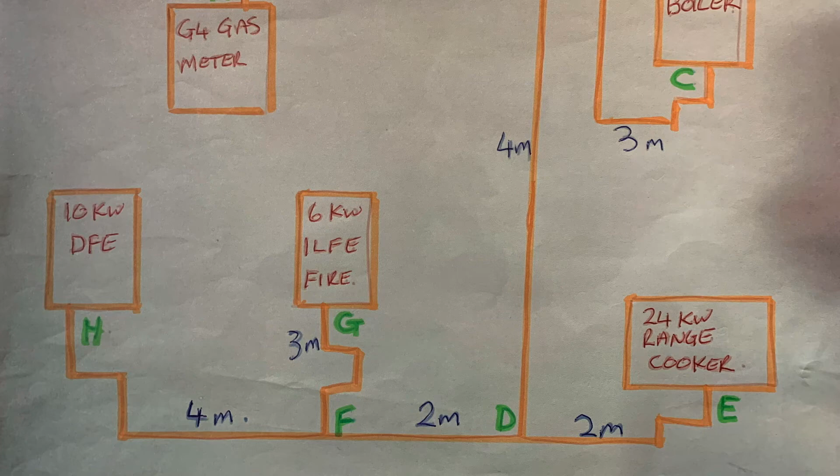In this video we're going to be going through step by step on how to complete the pipe sizing for gas according to British Standards BS 6891 2015. That's the standard we're going to be using to do that.

Everything is taken out of here, so there are a few things we need. First of all, we need a drawing of our pipe layout, including lengths of pipes and how many elbows and fittings we've got. So I've got that to help me.

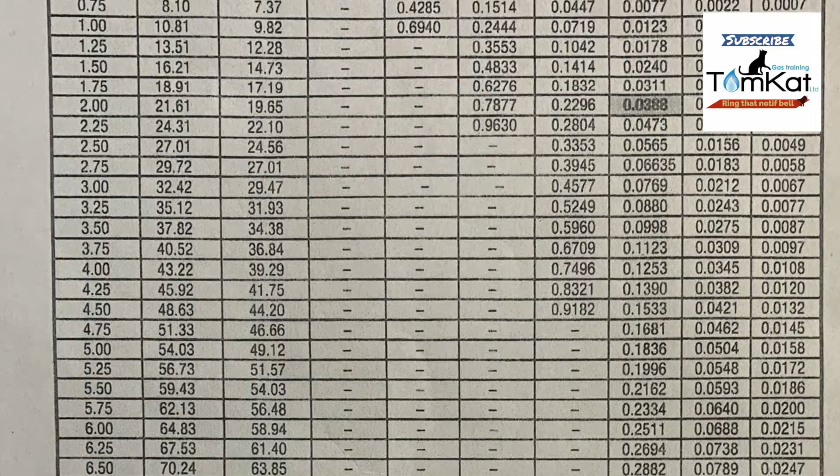We also, from the British Standards 6891 2015, need a couple of charts. From this chart here, we can see how many meters cubed an hour requires how much gas per meter, depending on the size of the gas pipe. We'll look at that a bit closer. At the bottom there's also a chart which tells us how many meters we would add on for fittings. Again, we'll look at that in a bit.

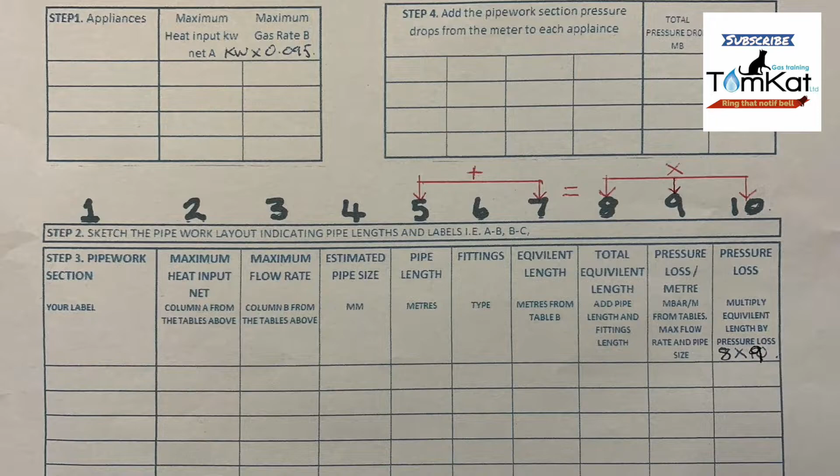And finally, we need a sheet like this, which is going to tell us what to do in this situation.

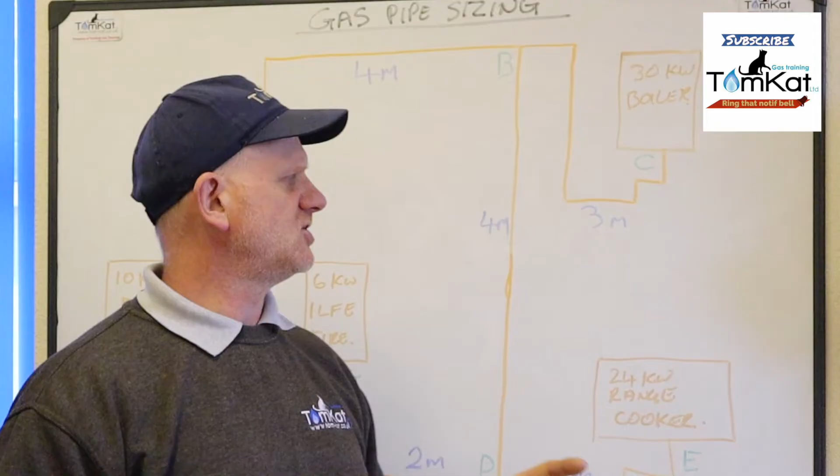Now, when you're designing this pipe layout and your installation, you must take into account the maximum gas flow rate meters cubed an hour going to the appliances. You should also really leave spare capacity on the installation just in case it needs to be changed. So if you wanted to up that boiler to 35, 36 kilowatts, you should allow spare capacity. But I guess if you did that, you'd never get the job, would you?

So these are the considerations you must take into account when you're designing this installation. Now, as usual on TomKat videos, I've waffled enough. Let's just get on with it now and find out exactly how to pipe size to British Standards 6891 2015.

A few things we need to be aware of before we get cracking and actually do the pipe sizing. In the British Standards there are different charts for different pipe materials - whether you're using copper, low carbon steel, or flexible stainless steel semi-rigid pipe, corrugated pipe. If you're using that, you need to use the manufacturer's instructions for the stainless steel flexible semi-rigid pipe to tell you all the details you need, because they don't have elbows, they have bends. But anyway, that's another thing you need to be aware of.

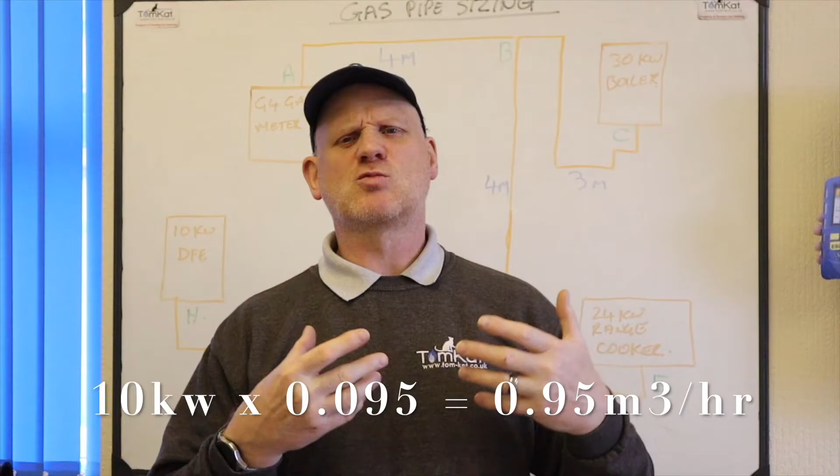Now, we are going to be using meters cubed an hour to find out how we're going to size. So 1 kilowatt requires 0.095 meters cubed of gas, and that's what we're going to be using. There are other scenarios you'll see in other training manuals and books showing you how to find that out, but we're going to use the standard of 0.095 for converting our kilowatts net into meters cubed an hour.

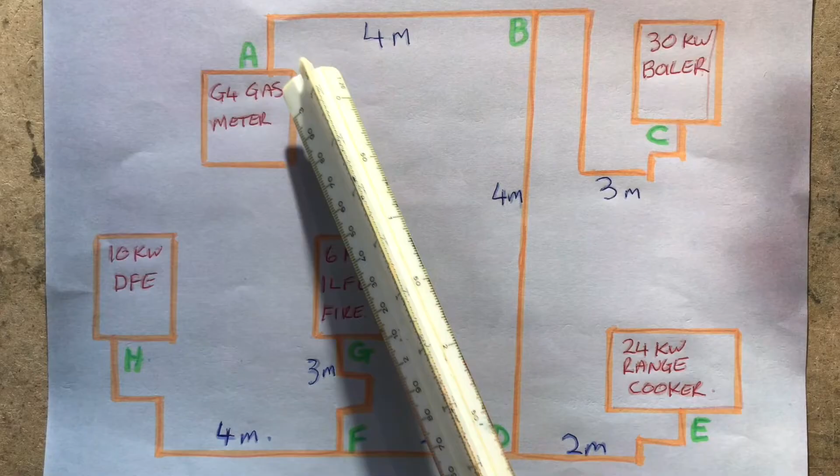So I think I've covered everything now, so let's get on with it. Now let's have a look at this drawing more closely. You can see we've got a G4 gas meter. Our pipe A to B is 4 meters long with an elbow and a T.

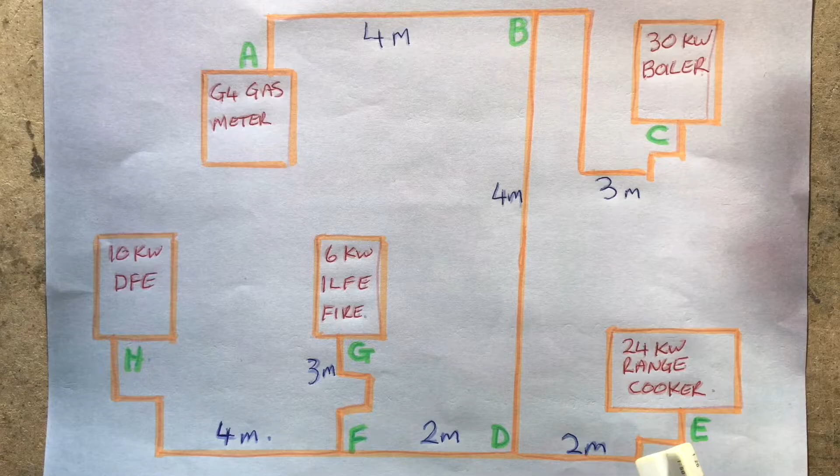Our B to C is feeding a 30 kilowatt boiler with 5 elbows. Our B to D is 4 meters long with a T. Our D to E is 2 meters long with 3 elbows. Our D to F has a T. Our F to G is feeding a 6 kilowatt inset live fuel effect fire, 3 meters long with 4 elbows.

F to H is feeding a 10 kilowatt DFE with 3 elbows. So that's our drawing. Now all these appliances added together come to 70 kilowatts net.

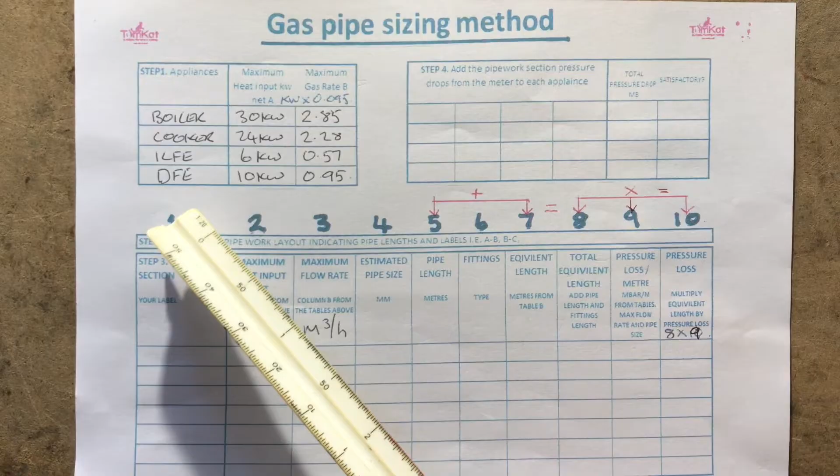Let's have a look at the next stage. The next stage now is to write our kilowatts and then convert it to meters cubed an hour. If you want to turn kilowatts net into meters cubed an hour, you just times the kilowatts by 0.095.

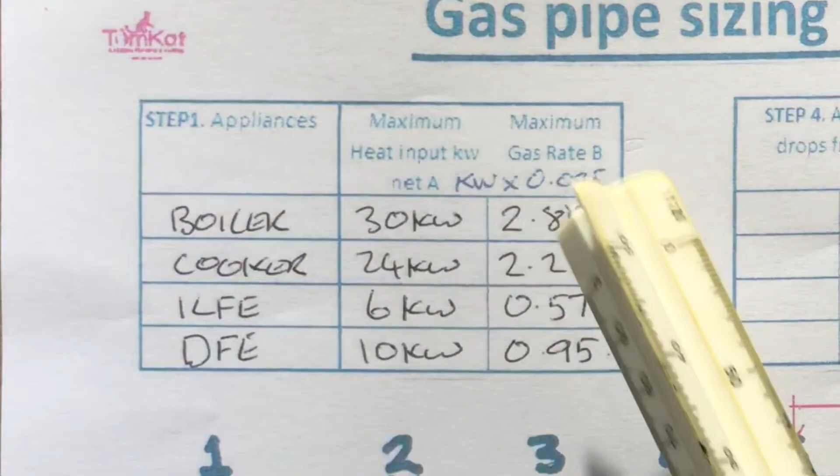So it's a 30 kilowatt boiler, comes out at 2.85 meters cubed an hour. 24 kilowatt range cooker comes out at 2.28 meters cubed an hour. 6 kilowatt inset live fuel effect fire, 0.57 meters cubed an hour, and a 10 kilowatt DFE is 0.95 meters cubed an hour. So that's the first thing to do, is transfer the kilowatts into meters cubed an hour and

Fill in this box. Now let's have a look at the paperwork we're going to be filling in as we're going along. We've done step 1. Step 2 we've already done. We've sketched out our drawing, and this is the one we're going to be using.

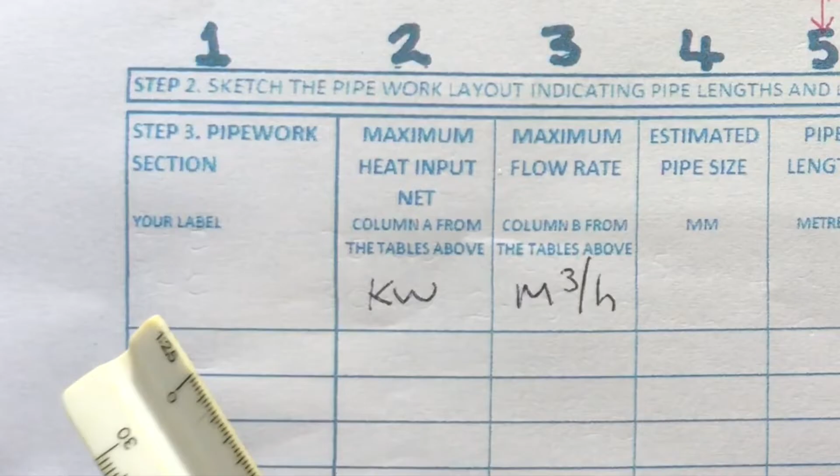So step 3 says pipework section, your label. So ours will be A to B, B to C. If you look at the drawing, ours goes A to B, B to C, B to D, and so on. That's what we're going to be putting in this section.

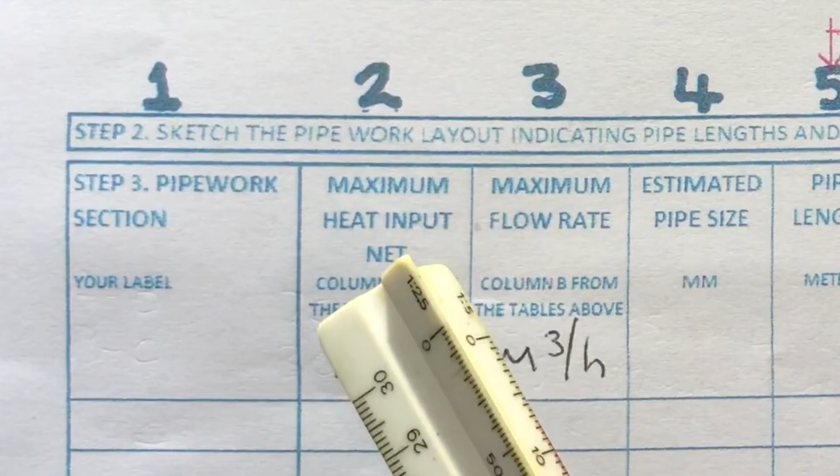The next section is our maximum heat inputs in net, so there are net kilowatts and our meters cubed an hour. We can write those in there. The next one is our estimated pipe size in millimeters, so we're going to guesstimate what we're going to be putting in here: 15, 22, 28, 35.

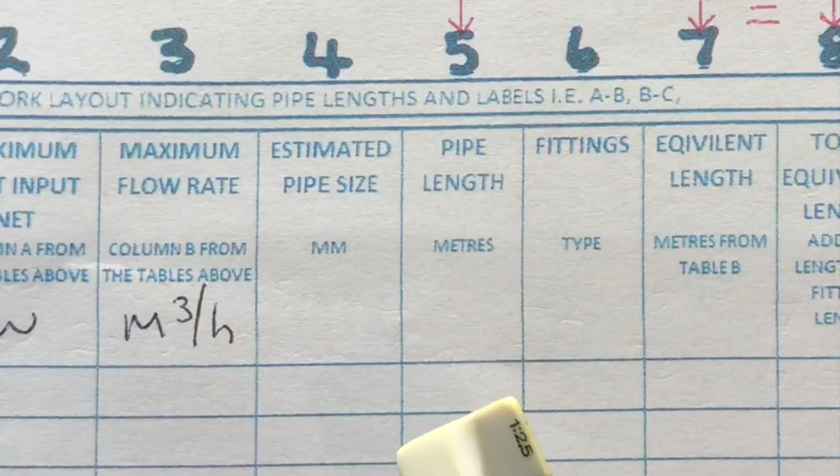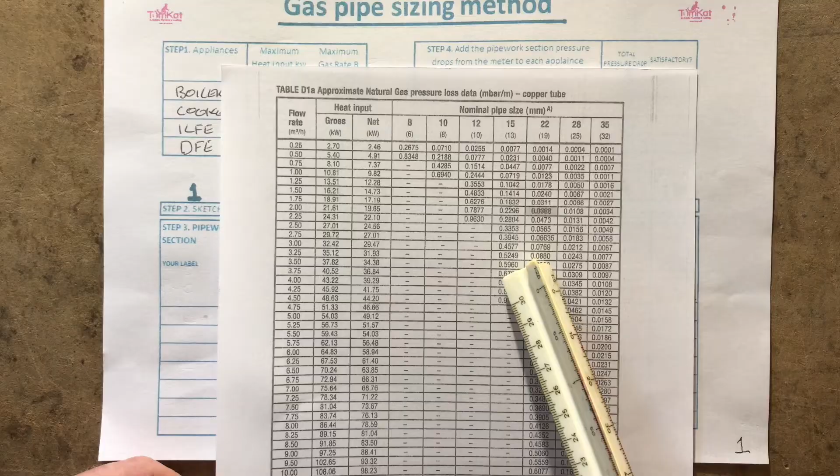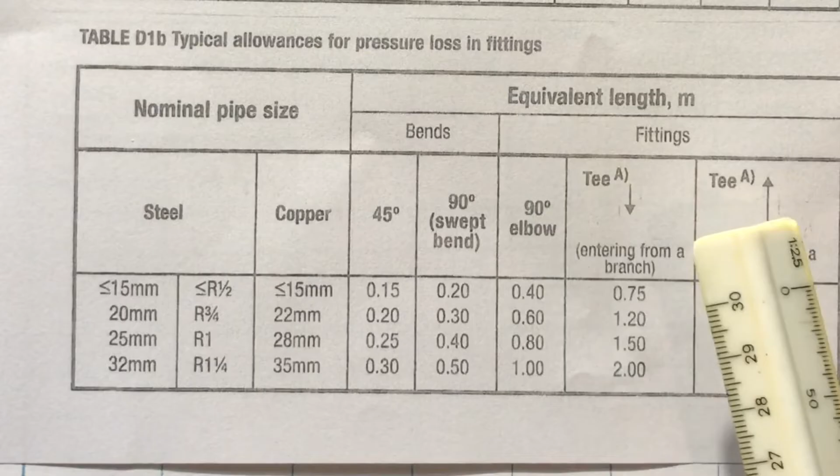The next section is for fittings. What I've taken out of the British standards are these 2 charts. We'll look at this one in a little bit closer, but this one shows us what allowance per meter we're using for fittings, so whether it's steel or copper pipe, whether we're using bends or 90-degree elbows, and which way flow direction the tee is - whether it's coming into the branch or exiting the branch. These are the different meters we're going to be adding on for fittings.

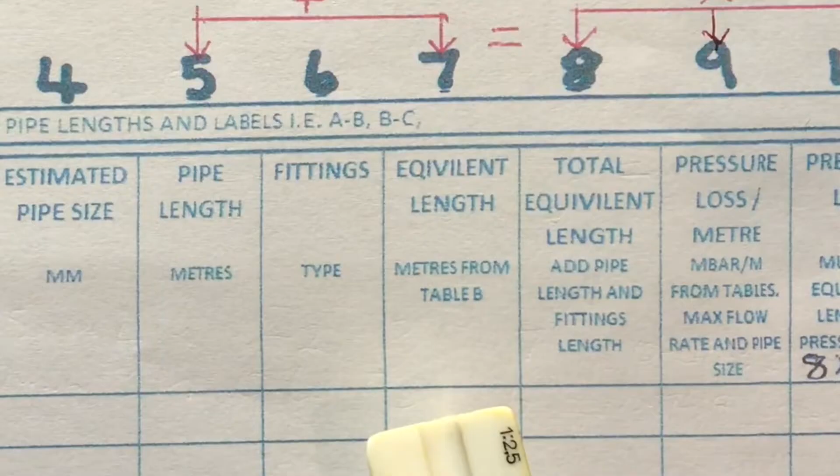This is where we're going to put our equivalent length from the fittings in meters, and this is where we're going to put our total length, adding what we've got there to what we've got there. So what we've got in column 5 added to column 7 will give us column 8.

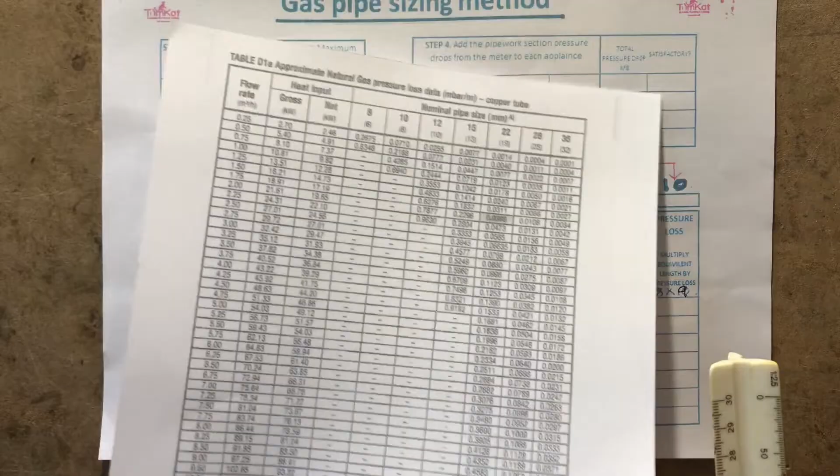Then our pressure loss in meters, which we're going to be taking from this table here. This is our flow rate in meters cubed an hour, or we could use our net kilowatts, but we're going to use our meters cubed an hour. Once we've got our total meters cubed an hour needed, we look across this line to the given size of pipe we require.

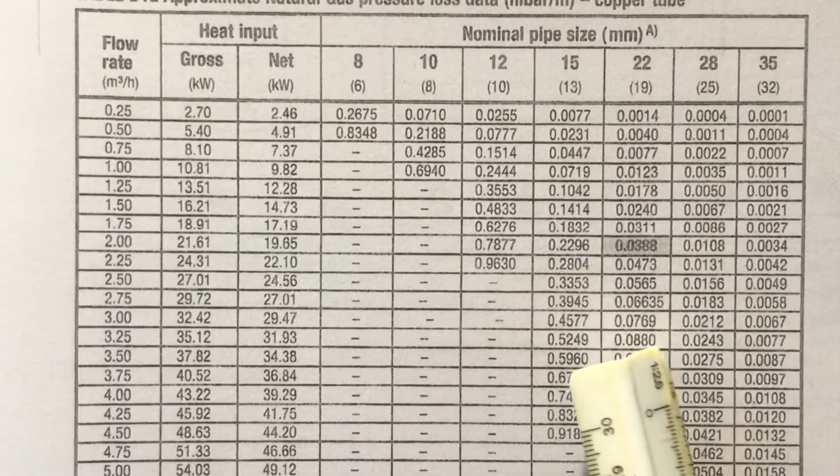And there is a series of numbers there, which we will then write into this section. To get this final figure at the end, whatever we've got in this column, we times it by this column to give us this column. So that's how we're going to be filling that in, and you'll see this as we're going along.

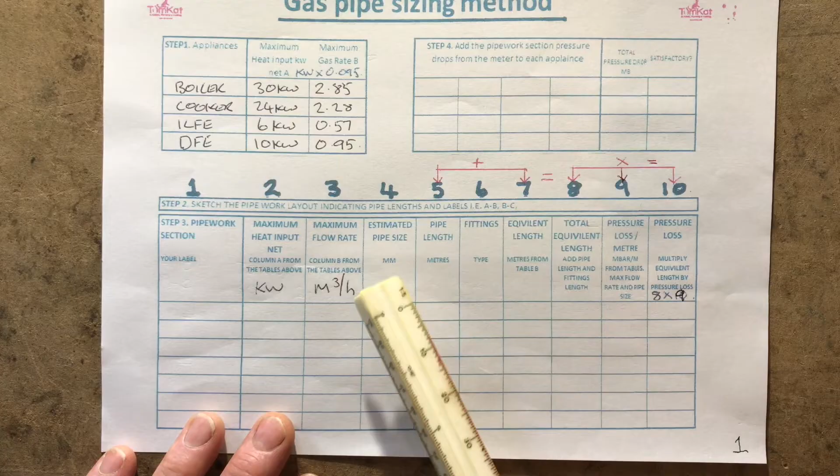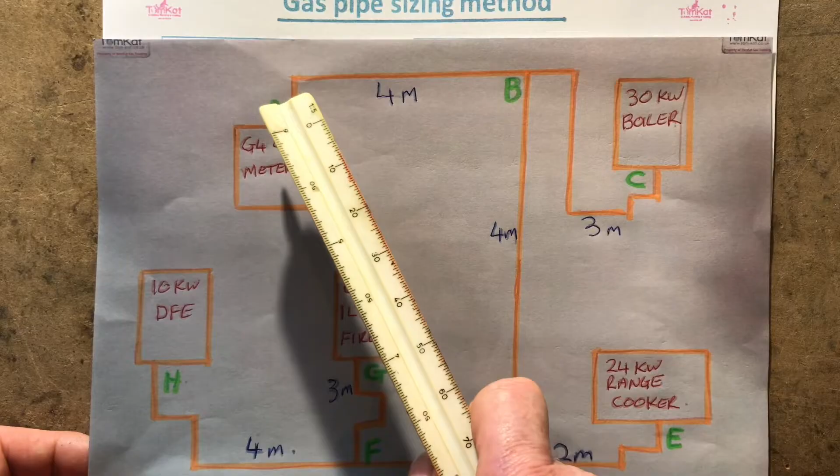So let's take our first section of pipe, which is A to B. A to B is feeding all the appliances, so we need 70 kilowatts because each appliance added up gives 70 kilowatts. Because from A to B, that pipe has to be able to feed all those appliances. Let's have a look at A to B.

Let's start by having a look at A to B. We know A to B is 4 meters long. It's got 1 elbow and a T. Once I've counted this T, I don't need to count it again. And the gas is passing through the branch.

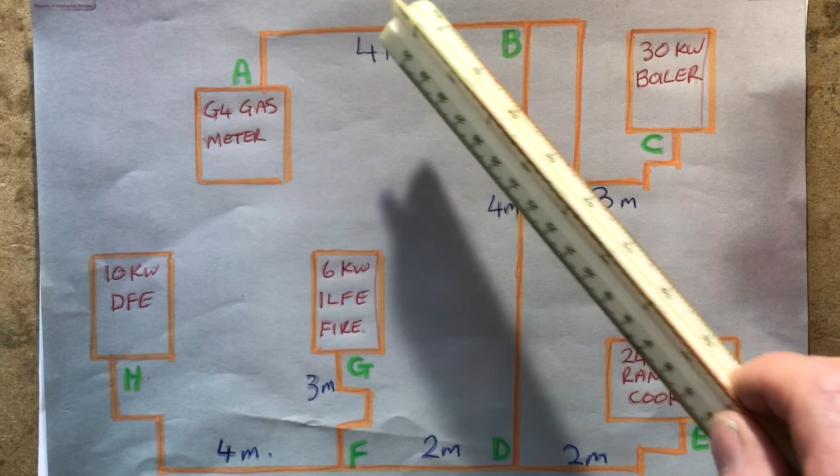So first thing we need to do now is estimate what pipe size we're going to be using, because it has to feed all 70 kilowatts, this first piece of pipe. So it's not going to be fed in 15 or 22 to feed 70 kilowatts. So we'll try 28 mil.

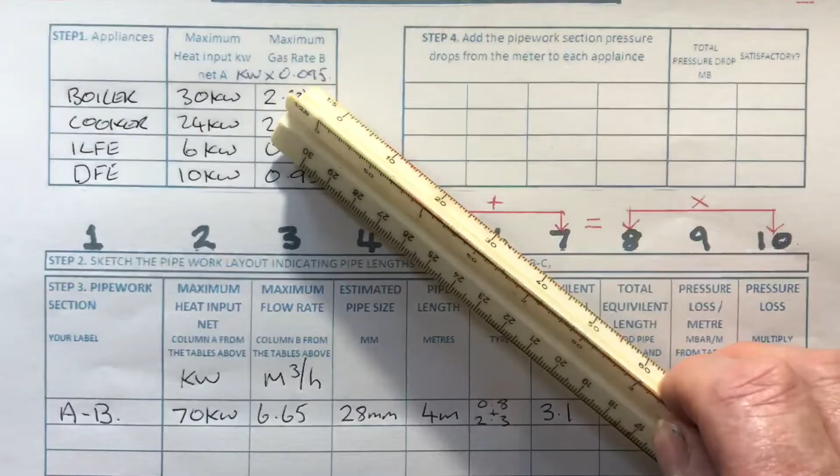So the first thing we need to do is start looking at our sheet. A to B, we know it's 70 kilowatts because it's feeding all the appliances. And if we look at this here, we need to turn it into meters cubed an hour. So 70 times 0.095, because 1 kilowatt net requires 0.095 meters cubed of gas. So that's where that comes from.

We've guessed at the 28 mil. We know it's 4 meters long from our drawing, so we can see it's 4 meters long.

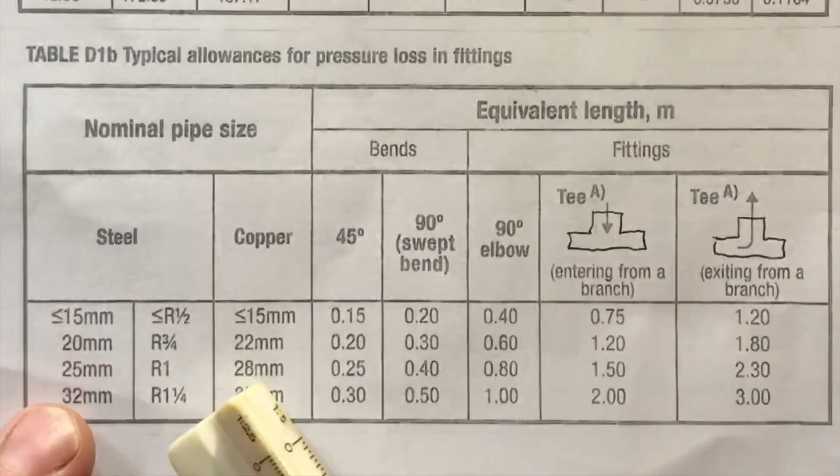Now we know we've got 1 elbow and 1 T, so we go to the chart here. For 28 millimeters, we've got 1 elbow which is 0.8 meters, and we've got a T where it's exiting the branch, so it's 2.3. If we fill those in, you can see 0.8 and 2.3. Add those together, that's 3.1. 3.1 onto the 4 meters gives us 7.1.

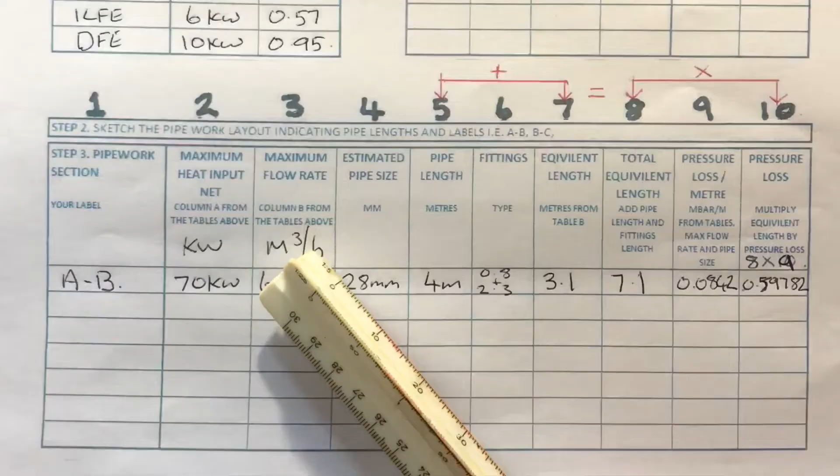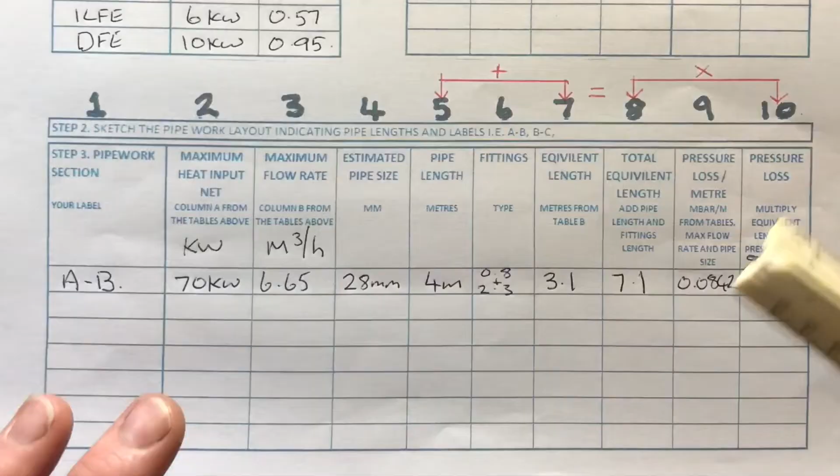So we now need to look at our pressure loss from the chart for 6.65 meters cubed an hour. We get our chart and look down here for the closest one to 6.65, which is 6.75. We look across to 28 mil and we can see the figure of 0.0842. Let's transfer that over. Then we need to do 7.1 times 0.0842, which gives us a total pressure loss of 0.59782 millibars. So we've got half a millibar drop in the first section without even adding an appliance on there.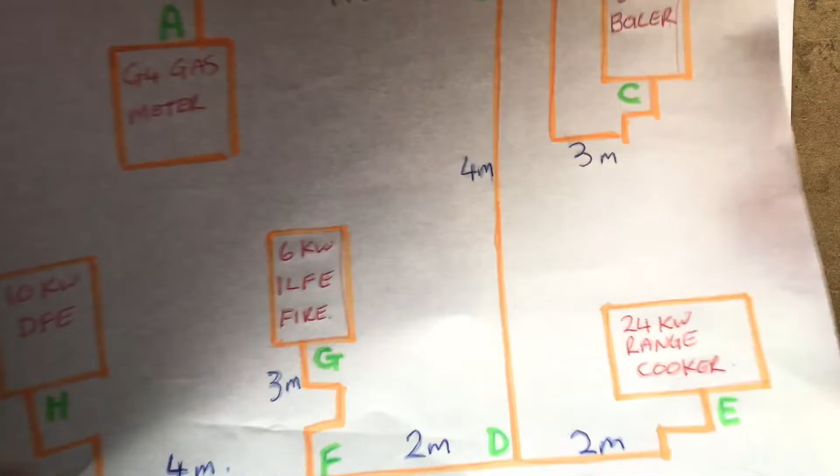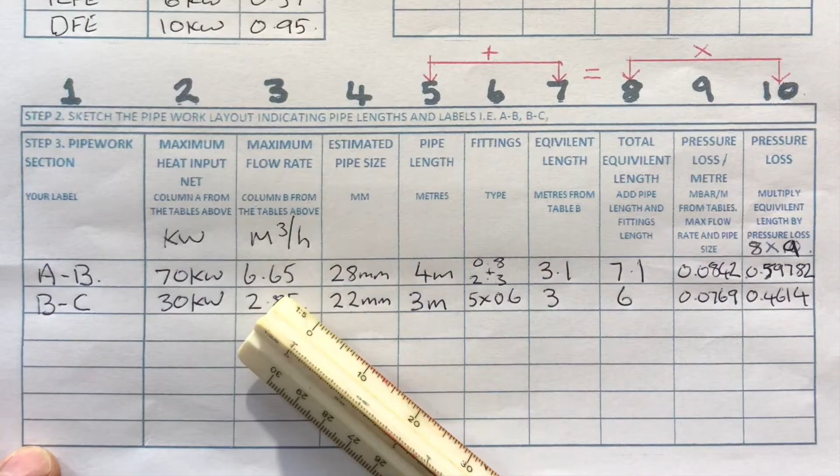So let's start down here, let's look at B to C. We know it's got a boiler of 30 kilowatts. 30 times 0.095 is 2.85, because if we look on the drawing again, it's only feeding the boiler, nothing else.

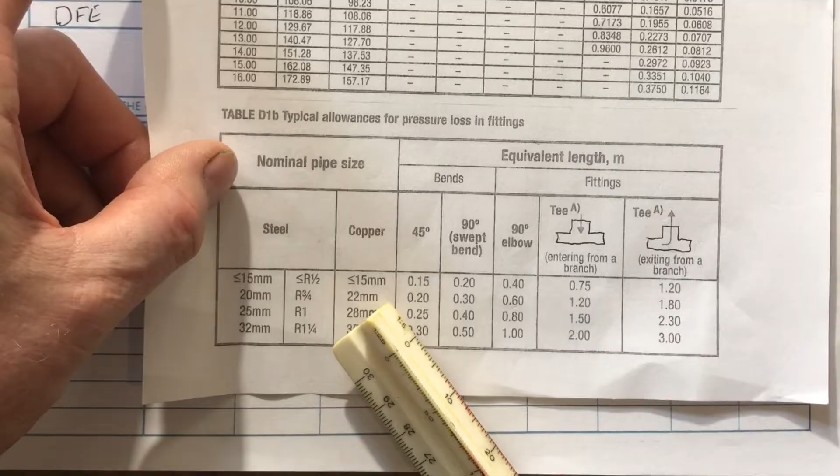We've guessed at 22 mil pipe. We can see from our drawing it's 3 meters long and it's got 5 ninety-degree elbows. So 3 meters, 5 times 0.6, because if we look at our chart here, for 22 millimeter elbows they're 0.6. We don't need to add the T because we added that last time. So 5 times 0.6 is 3. 3 meters plus 3 meters is 6 meters.

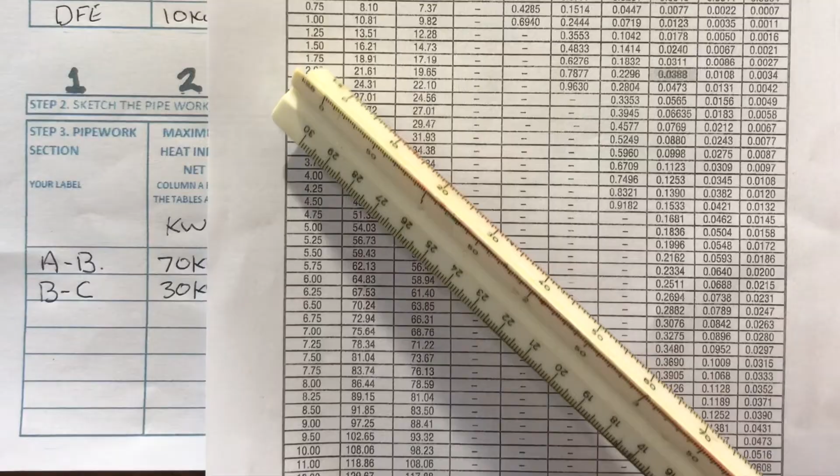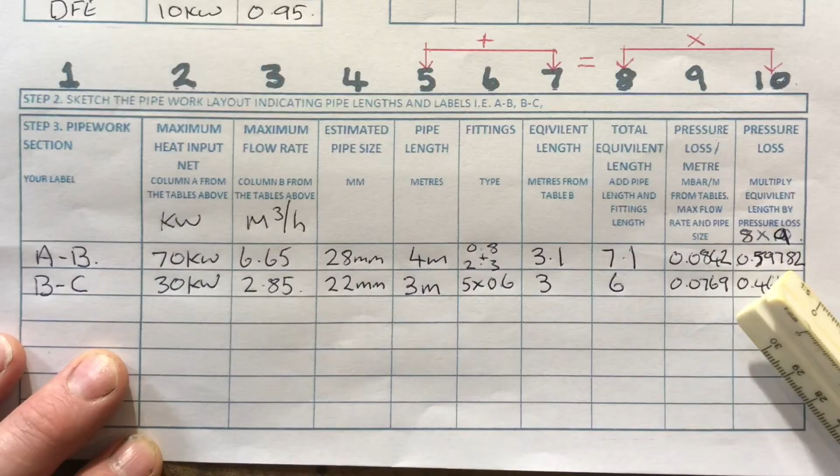Now we need the other chart. We go back to this chart because we need to look for 2.85 meters cubed. We go down here to 2.85, so the nearest one is 3. We go across here. We guessed at 22 mil pipe, so we need 0.0769. Now we do 6 times 0.0769, which equals 0.4614. Now I ain't no mathematical genius, but to me that's going over a 1 millibar drop.

So what we need to do now is, at the top here, we need to go A to B, B to C, because that's feeding the appliance. And you can see we've gone over the 1 millibar drop, so we got 1.05922. So that's a no-no.

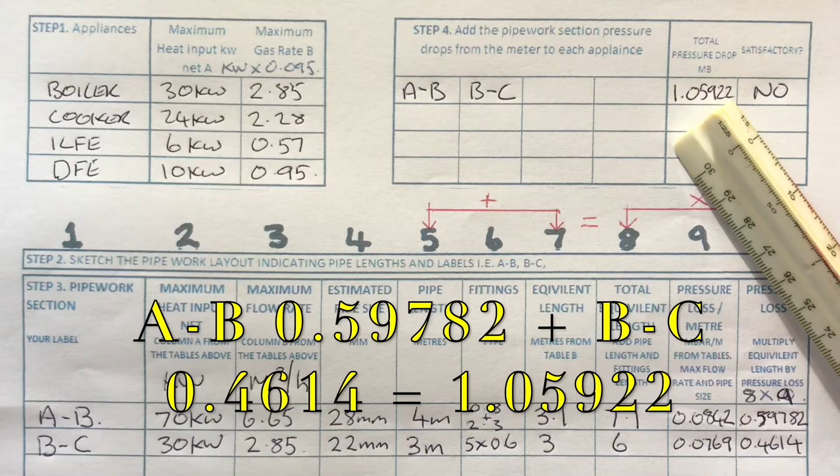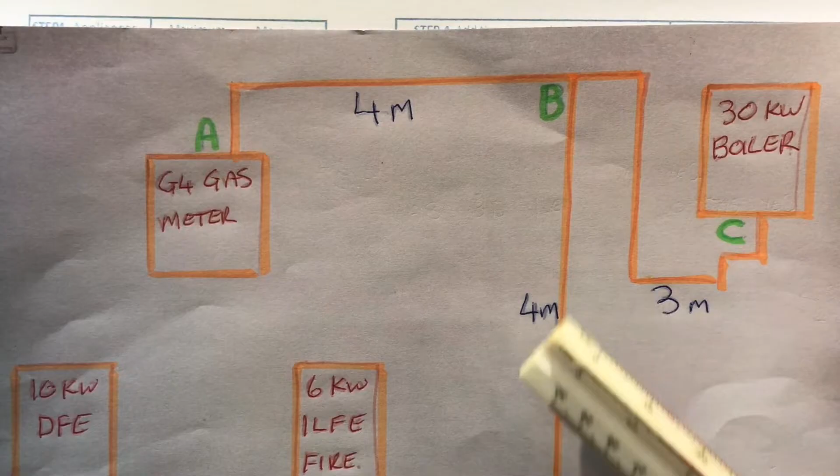So what we've got to do now is look back at our drawing and decide what we're going to do. Are we going to increase that size, are we going to increase that size? The easiest way for us now will be to increase that to 35mm, because it will also help us with the rest of the installation. So we'll leave that at 22 and we're going to up that to 35.

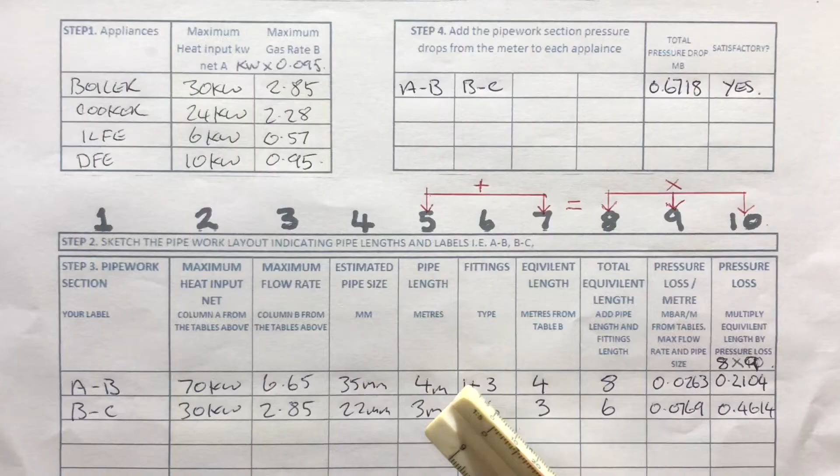Now let's have a look at changing this A to B to the 35, as soon as we've failed with that being 28. So A to B stays the same, 70 kilowatts stays the same, 6.65. We've changed that to 35mm now. We've still got the 4 meters, but our fittings has to change, because if we look at our fittings for 35, a 90-degree elbow is 1 meter, a T where it goes into the branch is 2 meters, and if it goes out of the branch it's 3 meters. So we've got big changes there.

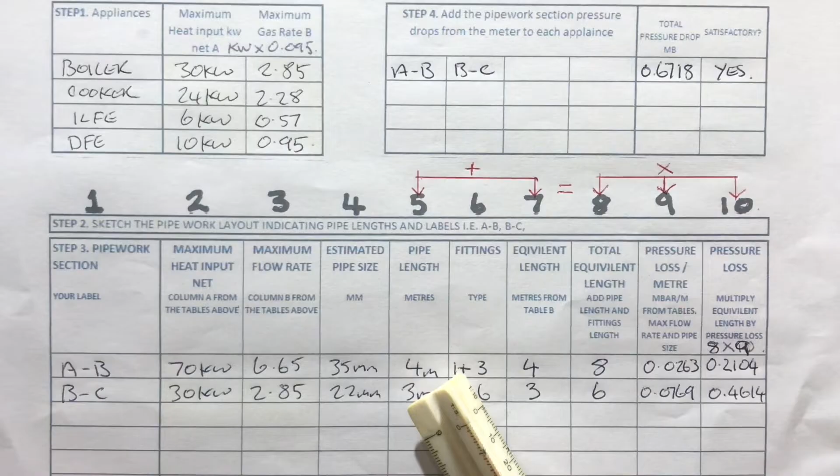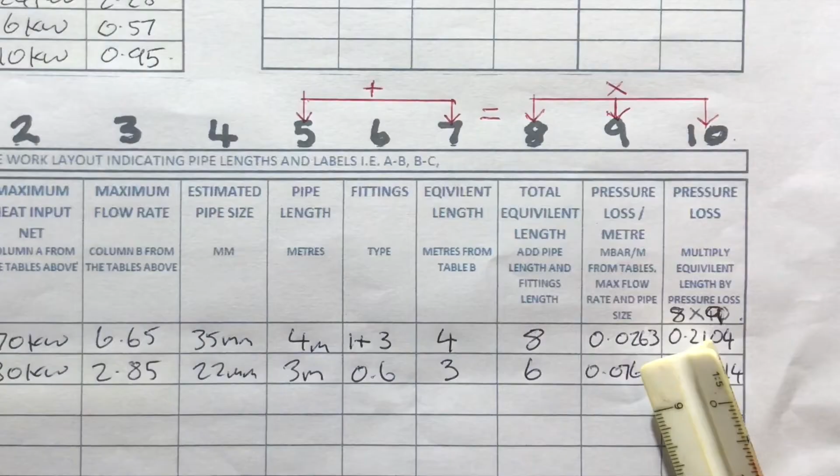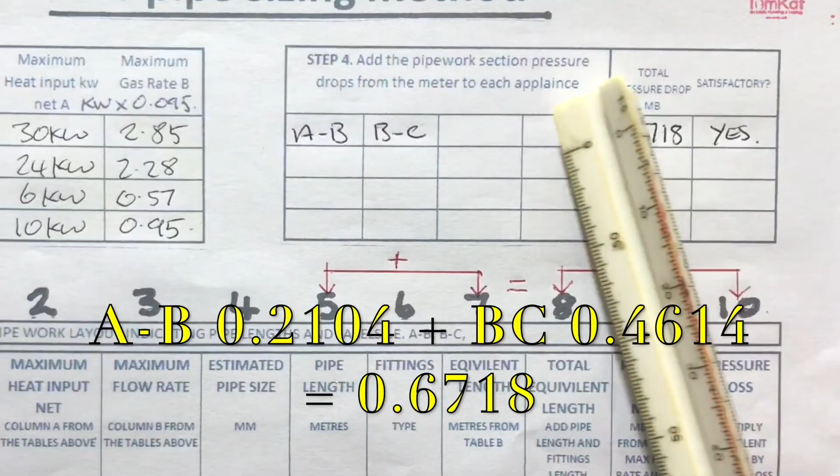So we end up with 1 and 3 - 1 for the 90-degree elbow and 3 for the gas exit in the branch. That becomes 4, which now changes to 8. We've still got the same reading of 6.65, but this has to change because we're timesing it by 8 now. So 8 times 0.0263 is 0.2104. If we look at the top, A to B, B to C to feed this boiler, we've now got a pressure drop of 0.6718. We're happy with that, so we can continue with the next one.

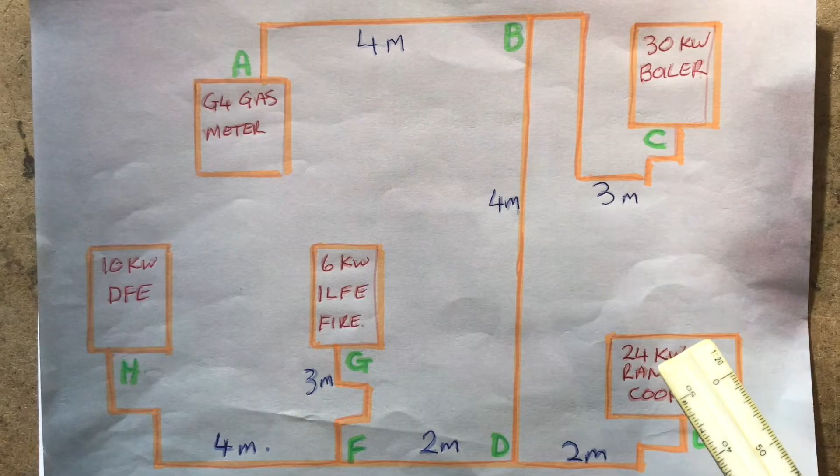Now let's look at B to D. Pretty much a straight piece of pipe with 1 T - that's all the fitting, so 4 meters with 1 T. But it's feeding a 24 kilowatt range cooker, a 6 kilowatt inset live fuel effect fire, and a DFE. So what size pipe are we going to choose? I reckon we go with 28 and see what that comes out with. So again, B to D, it's 40 kilowatts because it's feeding the 24 kilowatt range cooker, 6 kilowatt inset live fuel effect fire, and the 10 kilowatt DFE.

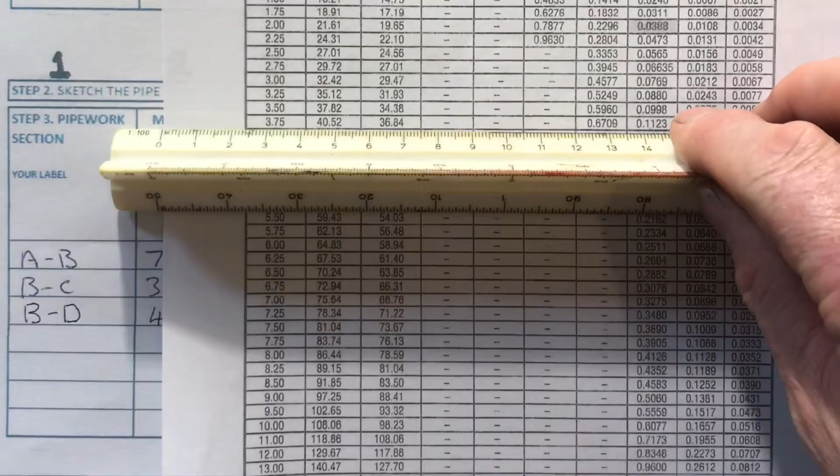So 40 times 0.095 is 3.8. We guessed at 28mm, we know it's 4 meters. Looking at our fittings for 28mm, we've just got 1 T, and it's coming down the branch, so it's 1.5 meters. There's no other fittings. 4 plus 1.5 is 5.5. Now we need to look on the chart again for 3.8 - we look down here, nearest we're going to get is 4, look across to 28, so we should have 0.0345. So 5.5 times 0.0345 is 0.18975. That's our B to D.

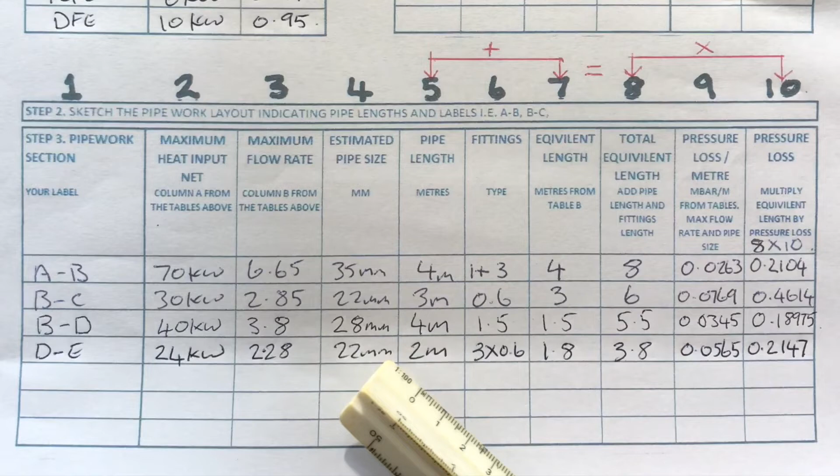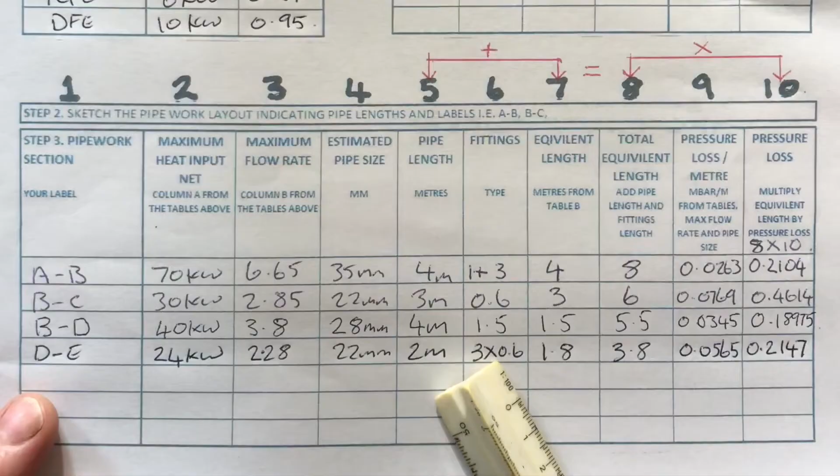Next we need to look at D to E. We've just seen from the drawing we're doing D to E, which was a 24 kilowatt range cooker. 24 times 0.095 gives us 2.28. We're guessing at 22mm pipe. We know from the drawing it was 2 meters, and we also know if we look at the drawing, there's 1, 2, 3 elbows. Looking on the chart for 22mm elbows, 90-degree elbows is 0.6. So 3 times 0.6 is 1.8, and 1.8 plus 2 is 3.8.

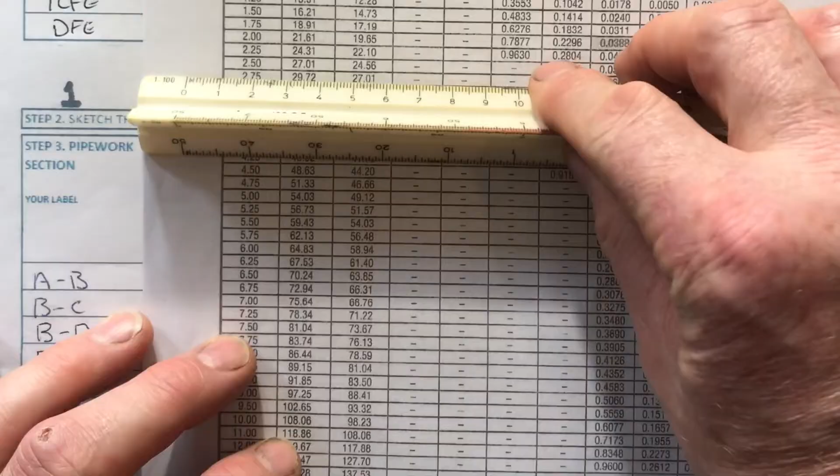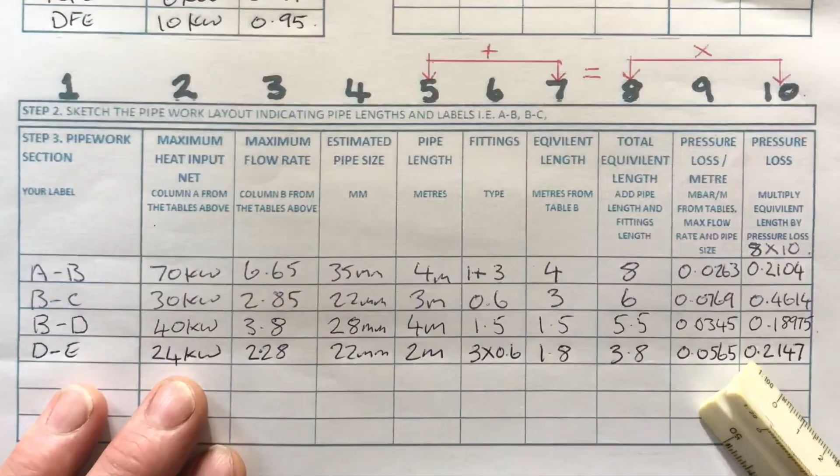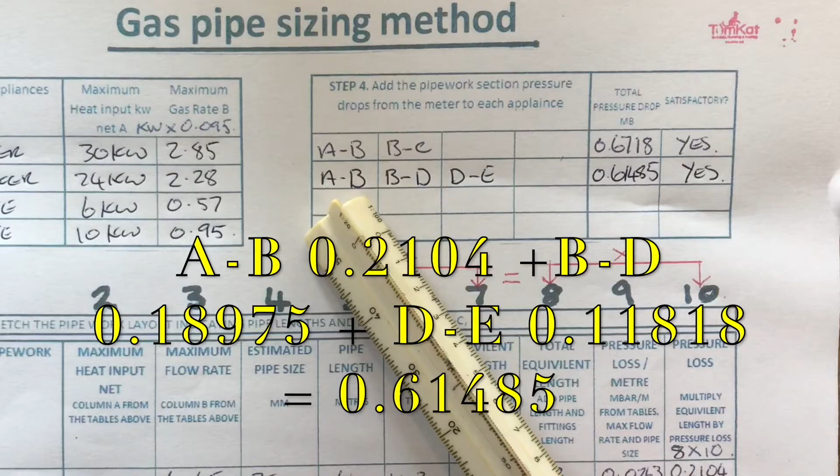Now we need to look down the chart at 2.28 meters cubed. Nearest one is 2.5, so we go across there to 22mm, which is 0.0565. Then we do 3.8 times 0.0565 equals 0.2147. Now what we have to do at the top is, because of the way the gas is going, to get down to here it needs to go A to B, B to D, and D to E. If we add those up, it comes to 0.61485, so that's less than a 1 millibar drop, so we can say yes.

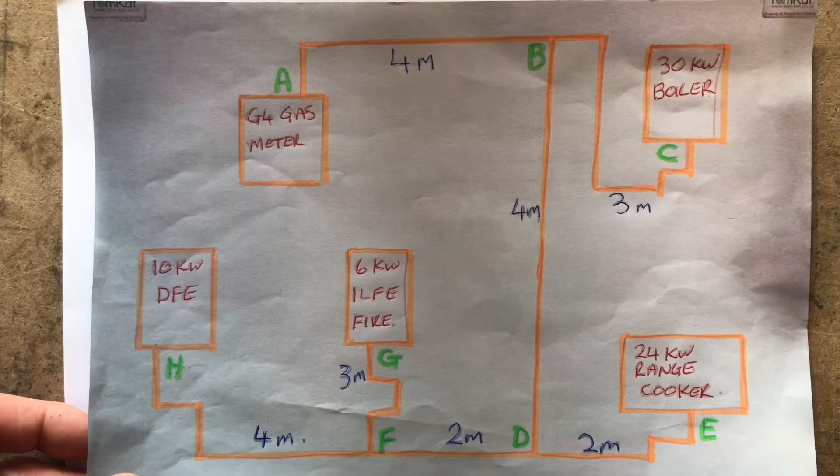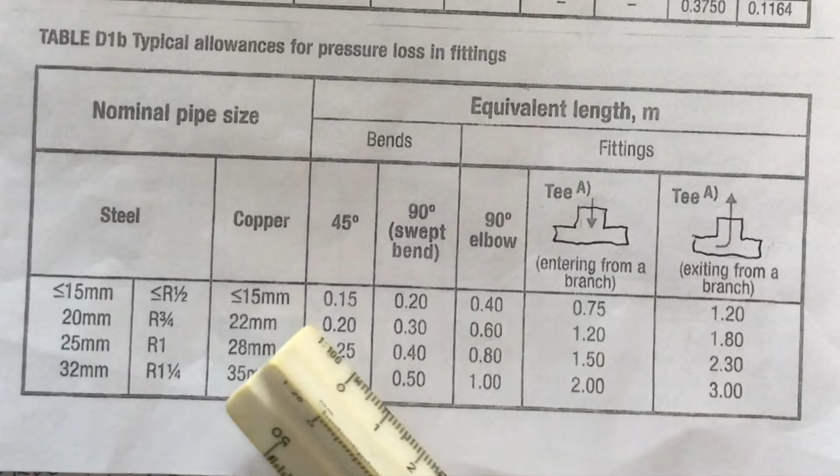Now let's have a look at D to F. We can see D to F is feeding our 6 kilowatt inset live fuel effect fire and our 10 kilowatt DFE, so 16 kilowatts it's feeding. D to F, 16 kilowatts. 16 times 0.095 is 1.52 meters cubed an hour. We're going to guess at 22 mil pipe. We know it's 2 meters, and we know there's 1 T. Looking at our chart for the fittings, we know it's 22, and we know the gas is going through the branch, so it's 1.8 meters. 2 plus 1.8 is 3.8 because there's no other fittings.

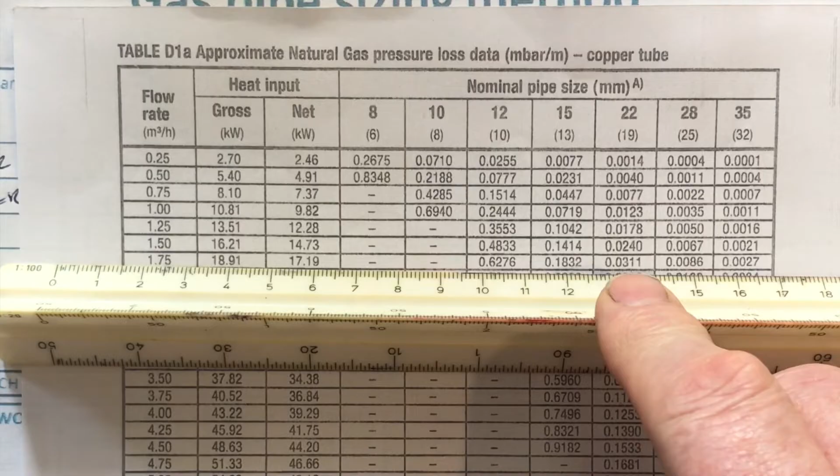So then we need to look on the chart now for our 1.52. Looking down, the nearest one is 1.75. We look across the 22 mil pipe, which is 0.0311. We then do 3.8 times 0.0311, which is 0.11818 millibar drop. So that is our D to F.

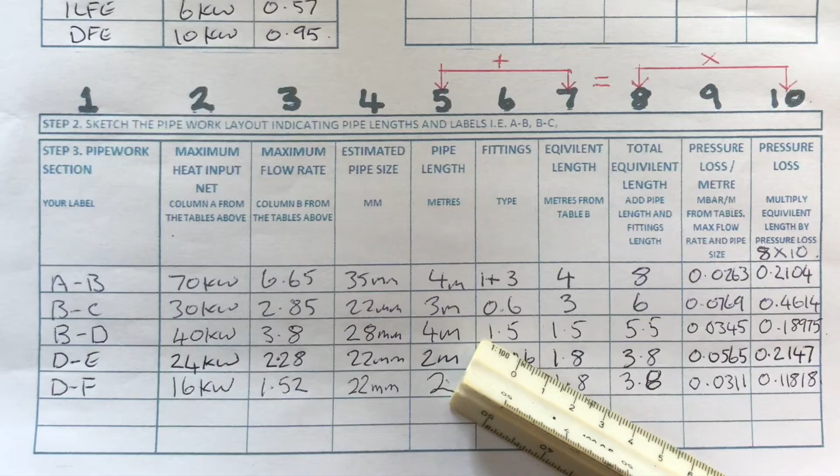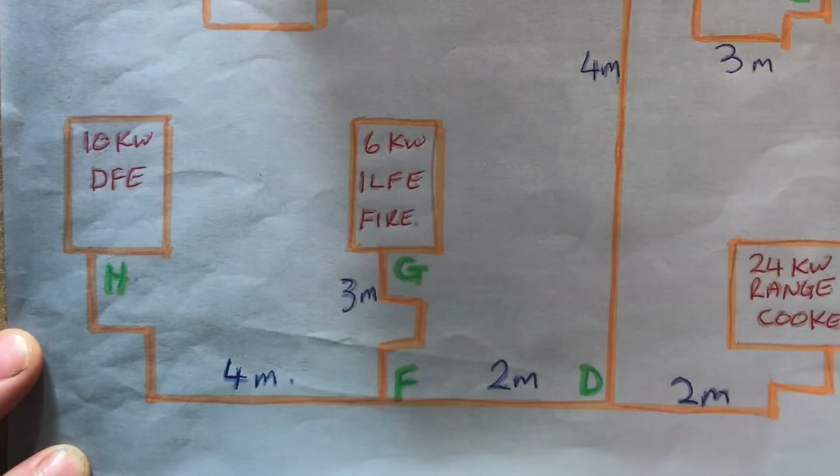Now our next appliance is F to G, which is the inset live fuel effect fire. Let's have a look at that. You can see from the drawing, F to G is 3 meters long with 4 elbows. F to G was 6 kilowatts - 6 times 0.095 is 0.57. We're going to guess at 15 mil, so the pipe is 3 meters long. We need to now look at the chart for the fittings. We can see 15 mil, 90 degree elbows is 0.4.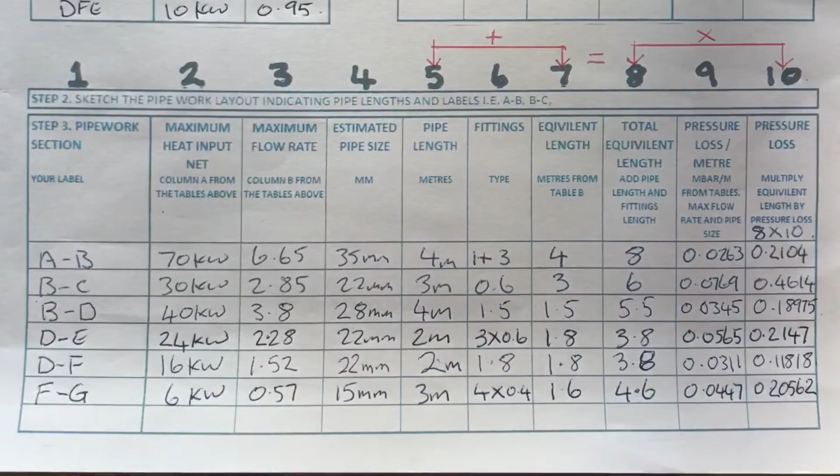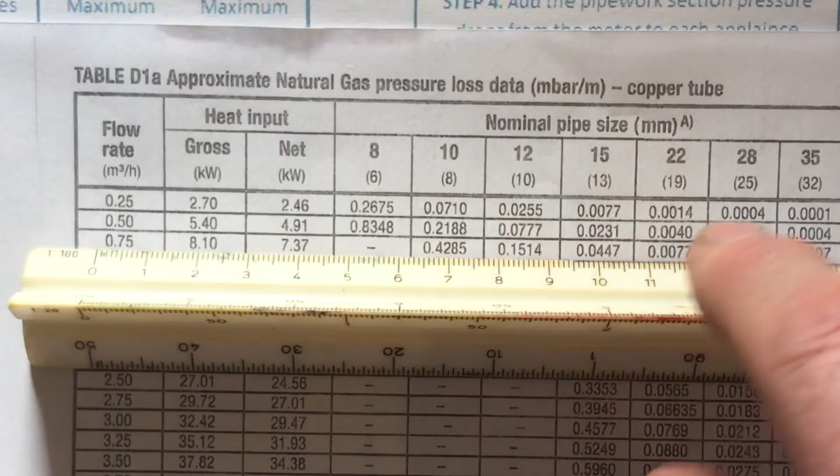So we can now do 4 times 0.4 is 1.6. 1.6 plus 3 is 4.6. Then we need to look down the 0.57, so we look down here. Nearest one is 0.75. Look across to the 15 mil, which is 0.0447. 4.6 times 0.0447 is 0.20562. Now what we've got to do again is, because it's going from A to B, B to D, D to F, F to G, we're not allowed more than a 1 millibar drop for that.

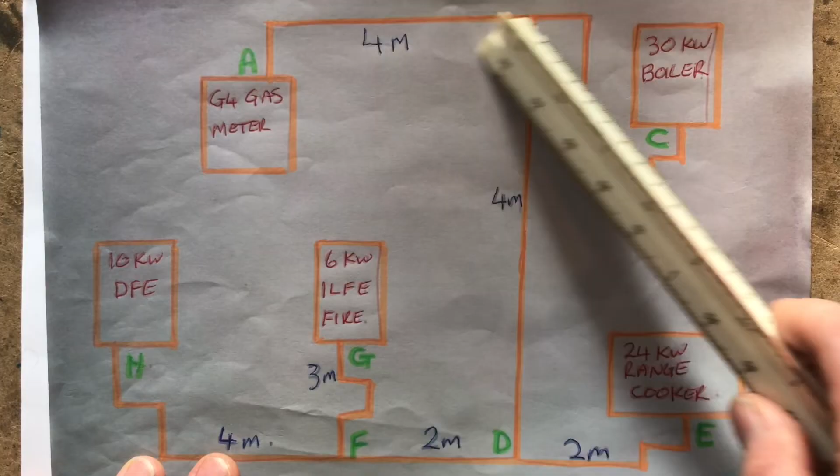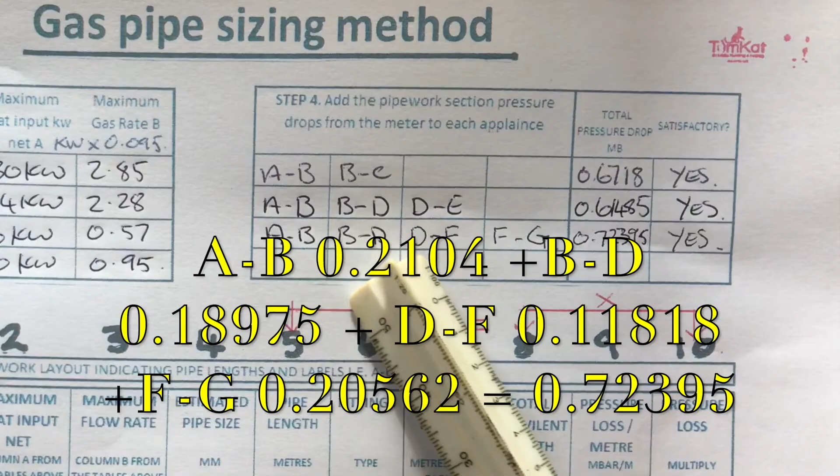So if we go back to our chart, you can see we've got A to B, B to D, D to F, F to G, and when we add all those figures up from there, we get 0.72395 millibar drop, which is less than a millibar. So we can deem we've sized it correctly.

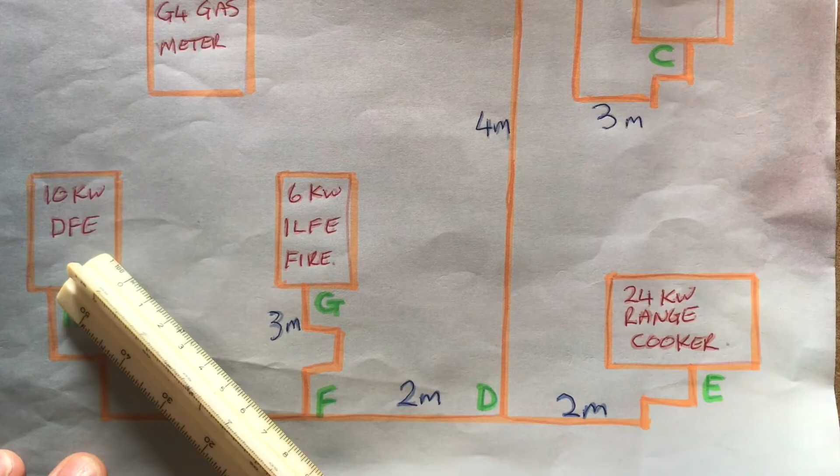So the last one we need to look at is F to H, which is just feeding the 10 kilowatt DFE, and there are 3 elbows. We've already counted that T, so we just got 3 elbows. So let's look at the final calculation.

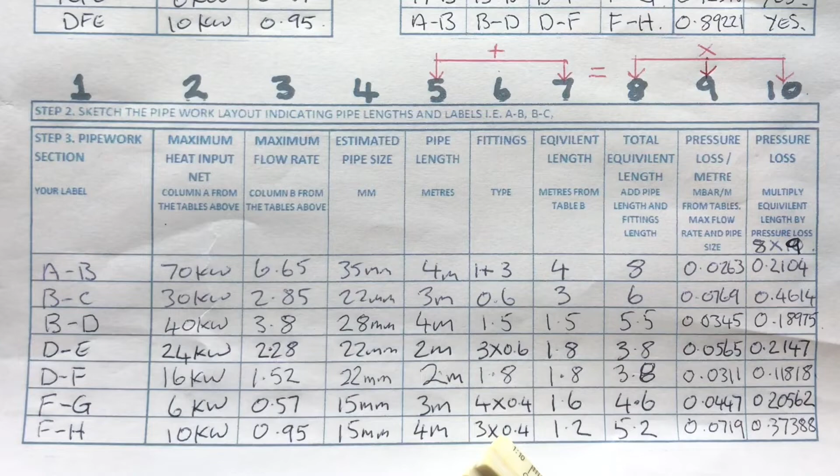Now here goes with the final one. We know it's F to H. We know it's 10 kilowatts feeding the DFE fire. So 10 times 0.095 is 0.95. We're going to guess with 15mm pipe. We know it's 4 meters long. We know we've got 3 elbows. So on the chart, 15mm 90-degree elbows is 0.4. 3 times 0.4 is 1.2. 4 plus 1.2 is 5.2.

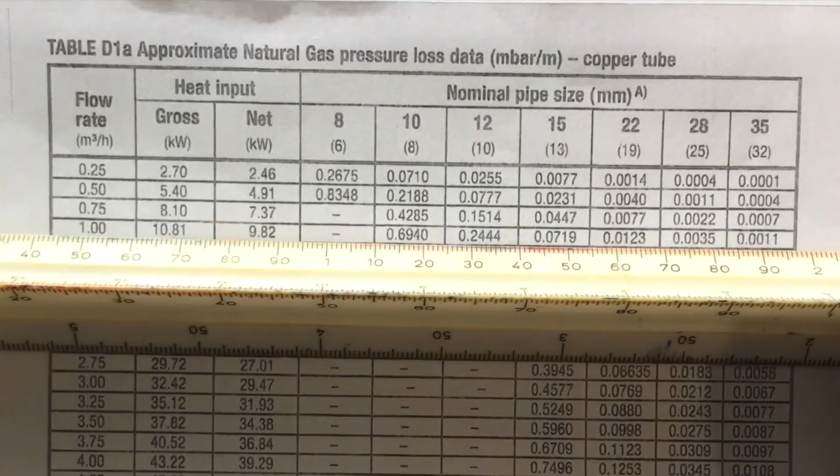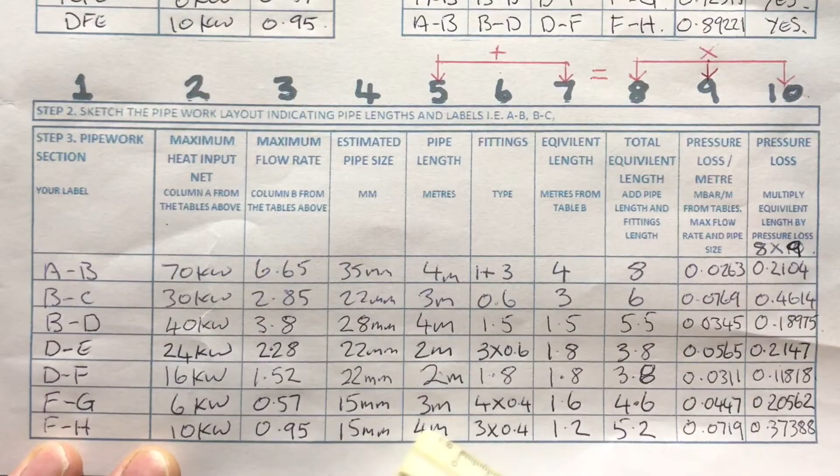Then we need to find 0.95 on our chart, so we'll look down here. The nearest one is 1. So if we go across to there, to 15mm, it comes out 0.0719. So we do 5.2 times 0.0719 is 0.37388 millibar drop. Now, because this is feeding an appliance, we can see from our drawing we need to go A to B, B to D, D to F, F to H.

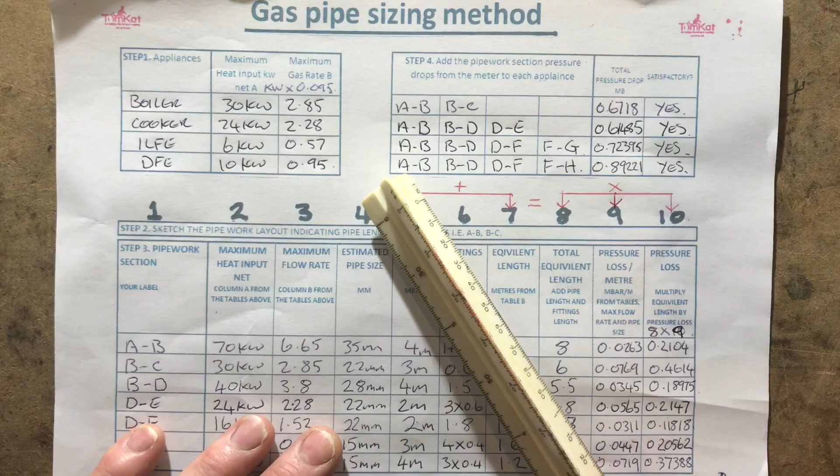So we go up to the top, A to B, B to D, D to F, F to H, and if we add those figures up, we come to 0.89221 millibar drop. So that's another yes.

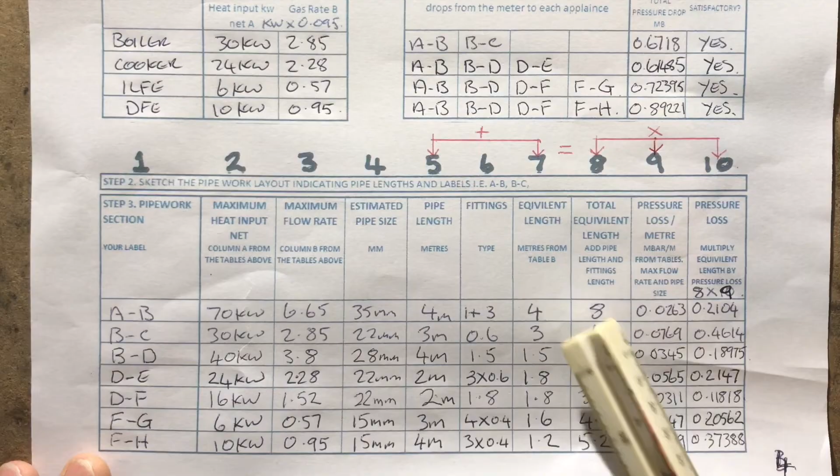So that's how you fill in the sheet. And again guys, if I've made any mistakes on the maths, don't kill me, because it is a pain doing all this. This isn't how to do the maths, this is how to work it out. So if I've made a mistake on any of the figures and you find them, don't put any comments down at the bottom telling me, because I probably already know. But anyway, that's how you complete the sheet.

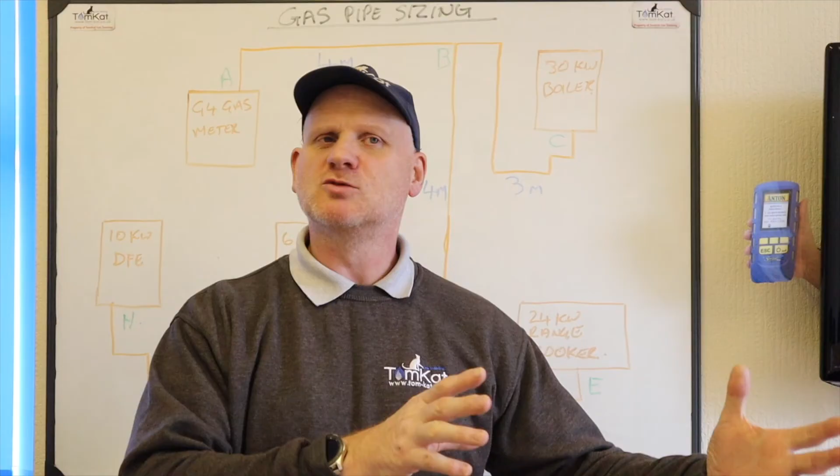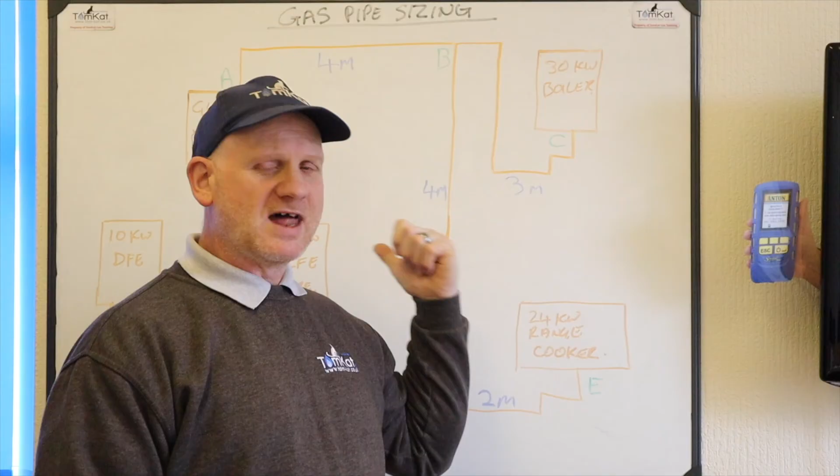So let's sum up then. That's the long-winded way of pipe sizing. Now there's going to be guys out there going, well, I'm not doing that, it takes too long, I'll use an app. Well, apps are good for telling you, going to a job and seeing if the guy who fitted it before you had installed the right size pipe, but they're not very good for actually doing this, because they only do one section at a time, so they are a bit of a pain using an app that way, and I can't ever get an app to work correctly. But anyway, that might just be me because I'm an old fossil, but there you go. So that's how you pipe size correctly to the British standards, and you will also have to do that in your ACS exams, whether it's initial or resit. It's not as complicated as that, so don't start panicking. It's nowhere near as complicated. But if you want to size a gas pipe correctly and accurately, this is the system and the way you need to do it.